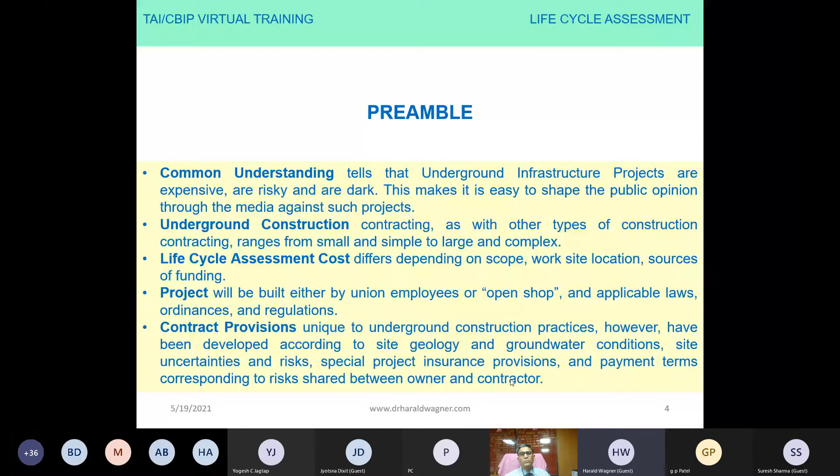Now, talking about life cycle analysis to evaluate the environmental impact of a project and the consequences generated throughout its life from different aspects, such as materials acquisition, construction, operation and maintenance, and finally its disposal and end-life treatment at the end of the project.

Life cycle cost analysis is considered an appropriate methodology by decision makers to evaluate the economical and socio-environmental sustainable infrastructure consequences of a project. It has many applications, among which it allows decision makers to compare and choose the best alternative to achieve sustainable development.

Usually, alternatives are considered between above ground and below ground structures, and in that respect many times we compare bridges and underground tunnel structures. Life cycle cost analysis is also utilized in the decision-making process during the planning and design stage in order to evaluate all constraints related to that specific project.

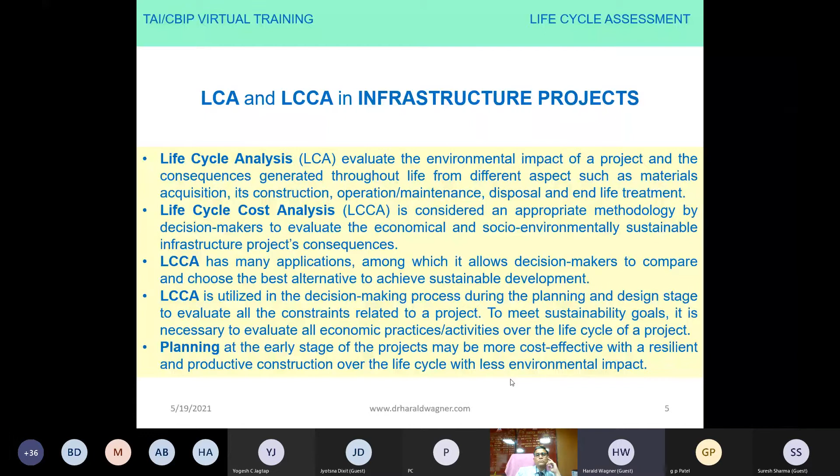That gives an additional dimension to every project if we not only consider the actual cost of construction in terms of excavation, tonnage of steel and cubic meters of concrete and so on, but also include the life cycle cost of the project itself, and if there are alternatives between different options.

In life cycle assessment, as we know, underground infrastructure may be susceptible to deterioration and issues associated with changing technologies, climate change, and societal needs. So aging of the underground infrastructure is just normal.

Underground space development requires a long-term commitment to technological advancements in an environment that is friendly to improved planning, innovation, and implementation. There exist few data regarding the environmental and social impacts and life cycle sustainability of urban development that can inform technology and administrative decisions related to the long term.

Long-term means considering decades or even centuries of infrastructure operation, maintenance, and reduced costs.

Comprehensive and scientific retrospective studies of the direct and indirect costs and impacts of various types of underground projects are needed to evaluate the usefulness and economic, environmental, and social impacts so that future planning can maximize sustainability. If we do not cover these life cycle aspects and assessment of life cycle costs, infrastructure and underground infrastructure projects are not completely in their consideration.

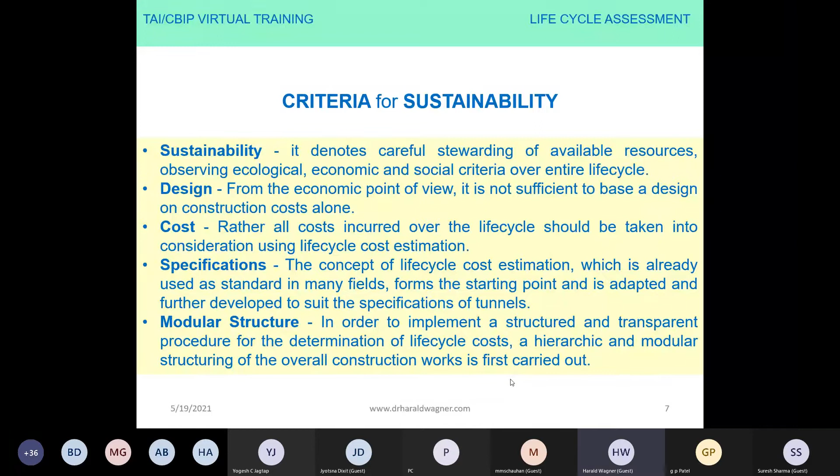The concept of life cycle cost estimate, which is already used as standard in many other fields, forms the starting point and is adapted and further developed to suit the specification, in particular of tunnels, as we are talking about tunnel structures essentially. In order to implement a structured and transparent procedure for the determination of life cycle costs, a hierarchic and modular structure of the overall construction works first has to be carried out. So this covers the criteria of sustainability.

Now, we are living in times of climate change and also on the influence, in particular, of CO2 concentrations, and in particular on the connection between carbon dioxide and global temperature increase. So we are talking about cost versus different options for life cycle project stages.

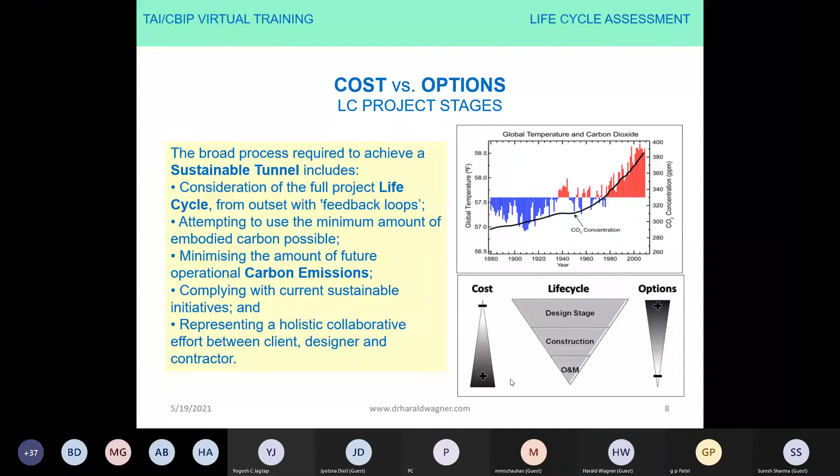One of the most important aspects is the ability to allow a company to reduce costs with an overview of the project. If the project is going over budget, we have to look at life cycle costs to help determine what alternatives are available to achieve cost reduction. Alternatives such as design, building components, and much more are just examples of such alternatives in life cycle costing in construction.

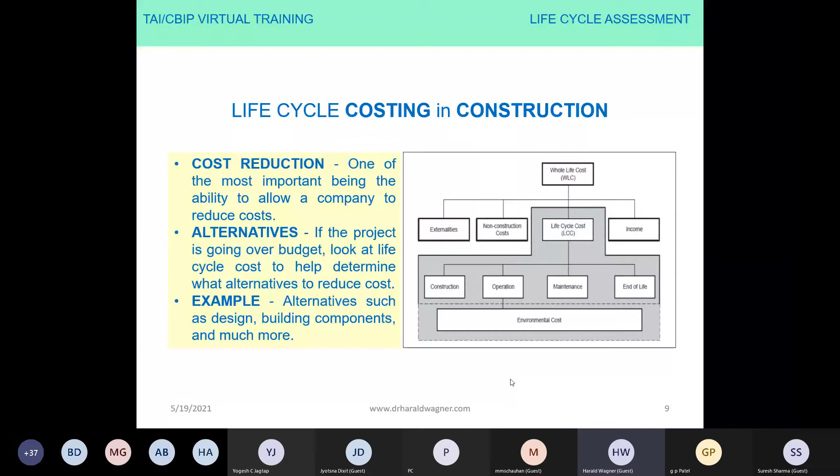What are the benefits of life cycle costing? First of all, life cycle costs shall help to determine alternatives for a more cost-effective and benefit-based project. So we like to optimize cost efficiency and benefits.

Factors that are determining over the entire lifespan of the project should allow the company, the owner, to encompass what they should do entirely. It is important to know that a life cycle cost doesn't necessarily determine the cheapest option from the point of view of starting the project available for a construction team.

It actually helps a company to determine the largest economic advantage with consideration of cost and benefit over the life of a project. Besides the ability to reduce costs, a life cycle cost helps a construction team to determine the maximum benefit of that project. This is done by analyzing the cost with the benefits in mind. Combining the two is what determines the overall success rate of the project.

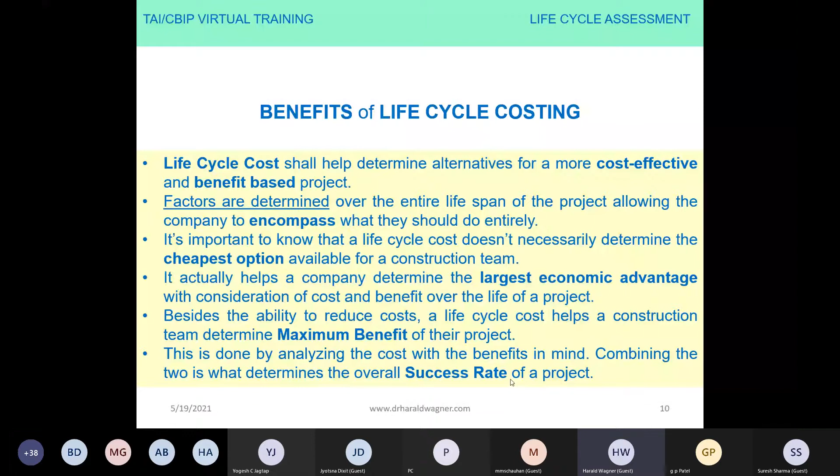Life cycle cost estimate starts with the evaluation of underground structure and often results in disputes regarding their construction cost, without considering their long-term benefits and neglecting their life cycle cost. So that can bring a project to a failure state.

There are trends towards sustainable structures in underground infrastructures. These have recently increased, and that is one of the benefits of life cycle cost evaluation and estimation. While estimating life cycle costs in civil engineering projects, the respective components reflect this development, the components which are determining the project itself.

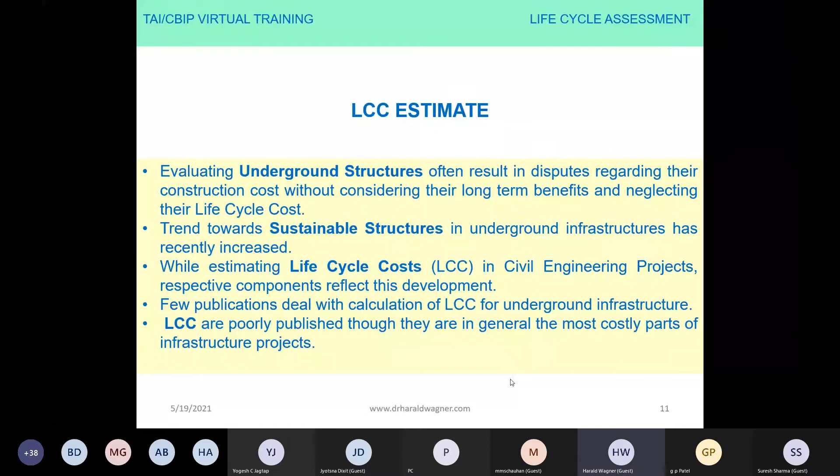Few publications deal with calculation of life cycle costs for underground infrastructure, and unfortunately not enough is published on that. Life cycle costs are poorly published, though they are generally the most costly part of an infrastructure project if we consider the whole life cycle.

We look into life cycle costs from start to end. Resource extraction and actual resource origin have to be questioned, as regarding cost and environmental impact, this is important in determination of the resources of the project.

After resources, actual construction happens, and the best suited contractor should be awarded the contract from the point of view of cost, reputation, and environmental impact assessment.

The third step is the on-site construction, which is the main component for the company, looking at the area of the entire project.

Occupancy and maintenance determine everything in the life cycle cost. Occupancy and maintenance of a project should be just as heavily looked after as everything else.

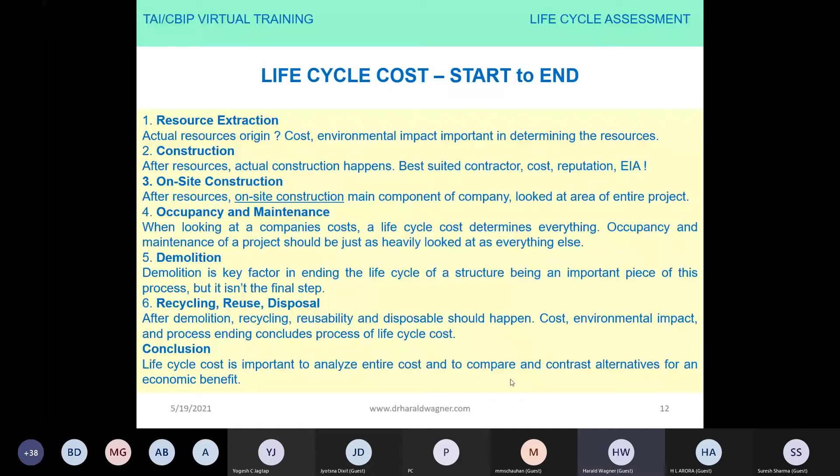From acquisition of material to operation, we have to look into the life cycle cost over the whole project, for instance for 30 or more years. So the systems acquisition covers about 20 to 40% of the whole, and the operating and support covers 60 to 80% of the whole life cycle cost.

Life cycle assessment has to study the environmental aspect and potential impact throughout the life cycle of the structure, from raw materials acquisition through operation, use, and disposal. General categories of environmental impacts need consideration, including resource use.

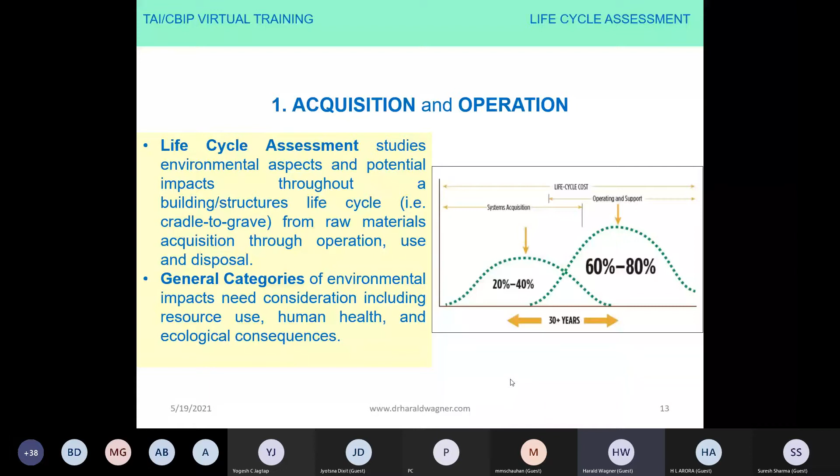Service life and capital cost are shown on this graph, which considers project identification, strategic planning, advanced life cycle and feasibility design phase, preliminary phase, detailed design phase, and the installation, construction, commissioning, and handover of the project.

At the beginning of project identification, we have approximately 75% of the project cost reduction opportunity, which decreases with further development of the project to 35, 22, and 16% of capital cost reduction opportunity, while on the other hand, the percentage of decisions affecting the total life costs increases.

There is a standard in development, ISO 15686, dealing with service life planning and the decision process addressing the service life, for instance, of a tunnel structure.

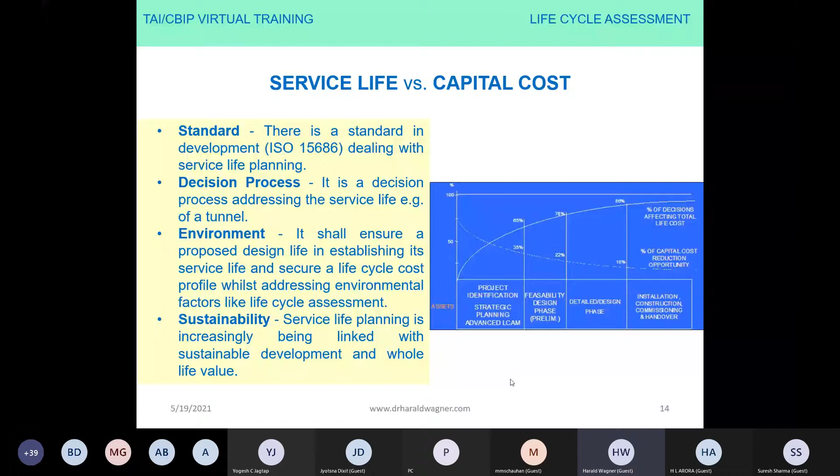It shall ensure a proposed design life in establishing its service life and secure a life cycle cost profile, addressing environmental factors like life cycle assessment. Service life planning is increasingly being linked with sustainable development and the whole value of the life cycle.

The life cycle costing and assessment starts with the initial costing, service life costs, maintenance costs, operating costs, and finally disposal costs. This is called whole life cycle costing.

It is the process of compiling all costs that the owner or producer of an asset will incur over its lifespan. The costs include the initial investment, future additional investment, and annually recurring costs, minus any salvage value.

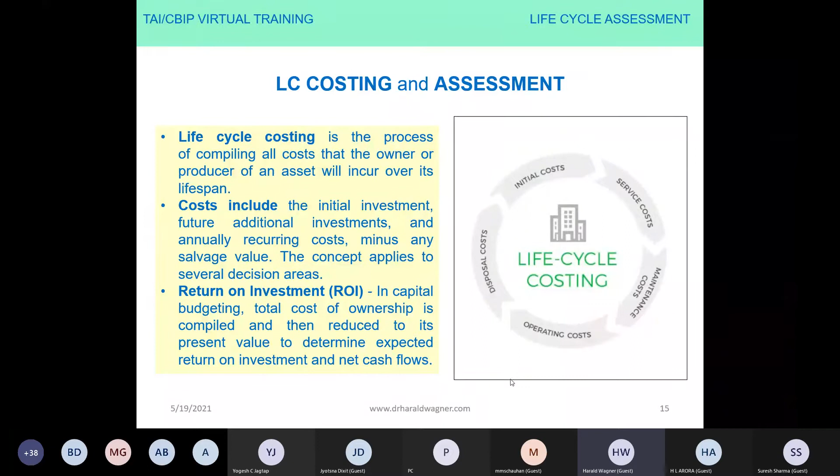The concept applies to several decision areas. Regarding return on investment in capital budgeting, total cost of ownership is compiled and then reduced to its present value to determine expected return on investment and net cash flows.

There is a modular process in total: scope of the analysis, followed by the development or adjustment of the life cycle cost model, defining the team and collecting information, populating the model, reviewing and optimizing the model, the decision and implementation of the solution, and finally the maintenance of the model.

The modules represent independent units built up for comparability between different alternatives. The process variety is then assigned independent of life cycle phases. This method of structuring enables a recording and evaluation of life cycle cost.

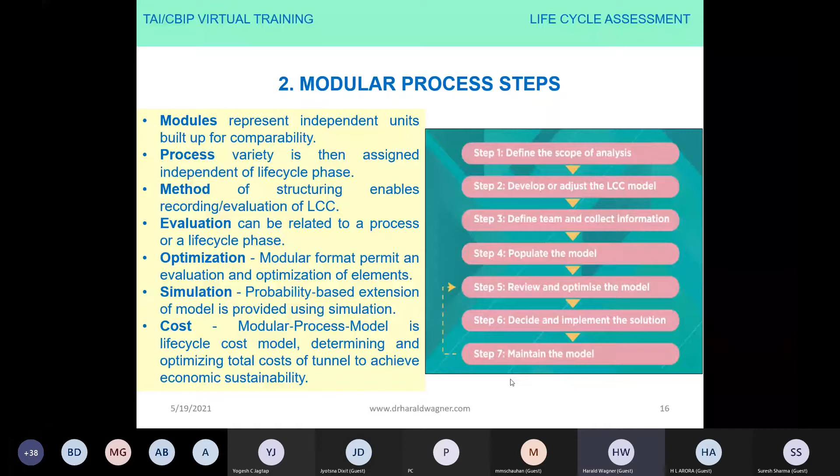The evaluation can be related to a process or a life cycle phase. The modular format permits an evaluation and optimization of different components and elements of the project. A probability-based extension of the model is provided using simulation models, and this modular process model is a life cycle cost model, which determines and optimizes the total cost of a tunnel to achieve economic sustainability, the final goal.

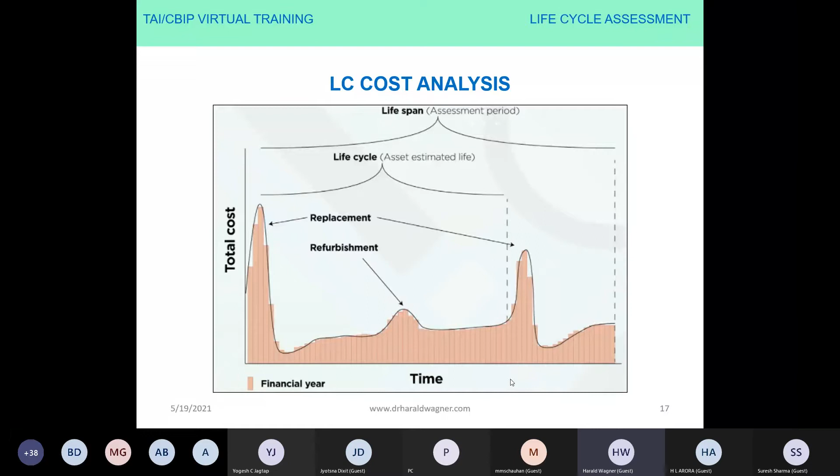In a short graph, an overview of life cycle cost analysis: we have a lifespan, or so-called estimated life of the project. We have total costs and replacement costs, and then we have costs over time for the refurbishment of that particular project.

The generic cradle-to-grave life cycle covers the mining of the project, the primary and secondary material processing, the fabrication or construction, the reuse, and the disposal, and finally the landfill, which may be the final ending of the life of the project.

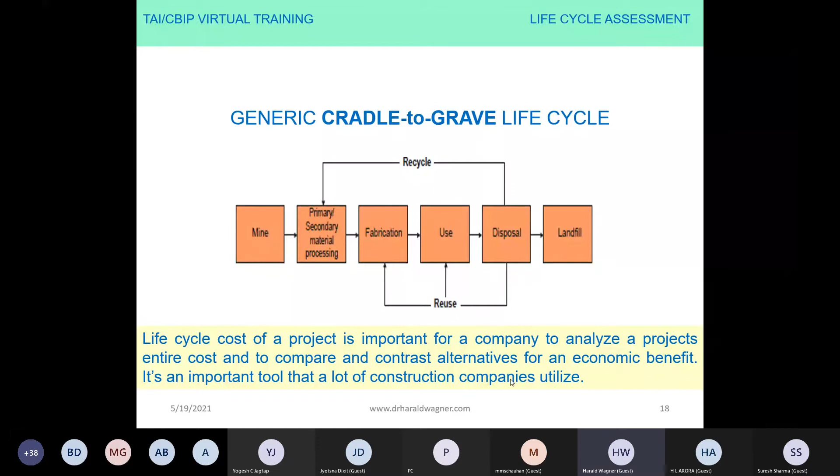The life cycle cost of the project is important for the company to analyze a project's entire cost and to compare and contrast alternatives for an economic benefit. It's an important tool that a lot of construction companies nowadays have to utilize when they consider the project.

What is the life cycle benefit and the life cycle cost? Underground space developments provide the opportunity to use surface space for other purposes such as green space, and I will give you in the following slides an example from the Boston Central Artery and from another project in the western part of America, from the Alaskan Way in Seattle, Washington State.

The parks or other above ground development within or closer to urban centers use—while quantification of such opportunities is sometimes difficult—should be included in the consideration of the sustainability of a project. Low impact design of infrastructure systems shall reduce the environmental impact, and transportation costs is now incorporated.

Hello. Incorporated into urban development, and this has been focused on the Transportation Research Board annual conferences in Washington in 2009. Can you still hear me? Yes, sir. Hello. Okay.

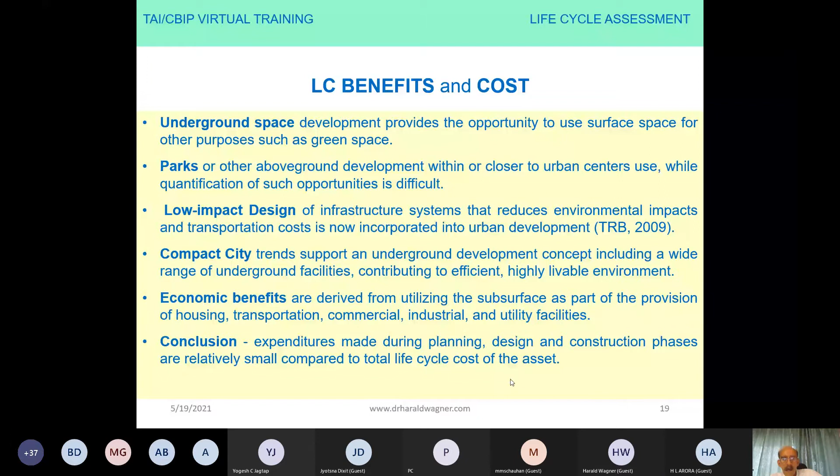In conclusion, it can be said with regard to life cycle benefits that expenditures made during planning, design, and construction phases are relatively small compared to total life cycle costs of that asset. So therefore, they are so important.

Now, let us consider compact development and smart cities, and take the example of the Boston Central Artery, where an elevated structure has been compared with an underground structure. I spent many years traveling from Boston to New Hampshire.

So the Central Artery Boston project has been one of the major urban projects, an example of the increasing population in that urban area, and of the change in transportation from individual traffic to mass transport traffic.

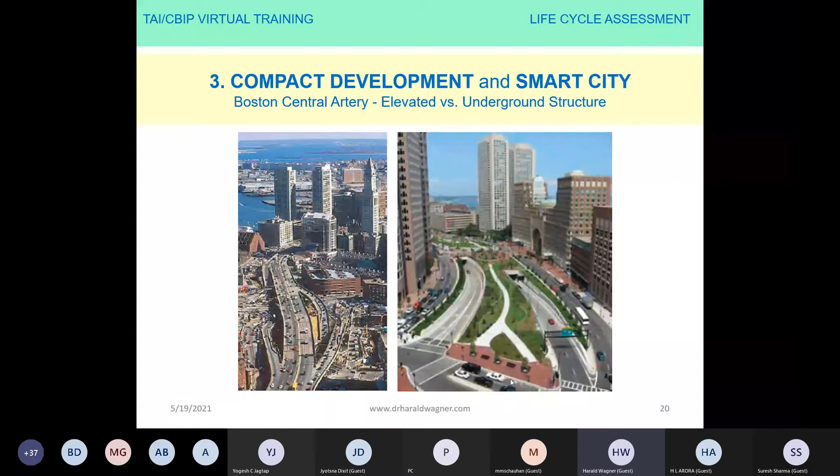This shows the braced excavation for a cut and cover section of that Boston Central Artery, which during construction, of course, has a very heavy impact on surface life. But finally, after completion of the project, the benefit is shared by everybody.

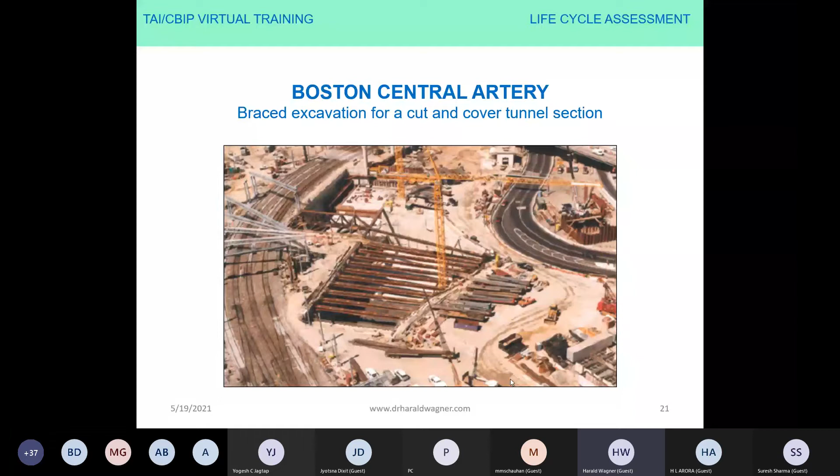The Boston Central Artery also focused on reuse of excavation materials. The excavation material from Boston Central Artery, also called the so-called Big Dig project, was uncontaminated and has been used to stabilize slopes and fill and cap the landfill to convert it into recreational landscape and recreational use.

The material was transported in more than 4,400 barge loads—these are big ship loads—to the island, beginning in 1992, and was used to cap the landfill with a 2-foot clay cap. The cap created an impervious layer that would serve to keep precipitation from mixing with the wastes beneath and leaching into the harbor.

The excavated fill was mixed with biosolids from several waste composting facilities in New England to create topsoil that was subsequently vegetated to keep the cap in place. Approximately 2,400 trees have been planted and 26,000 shrubs were planted on that fill.

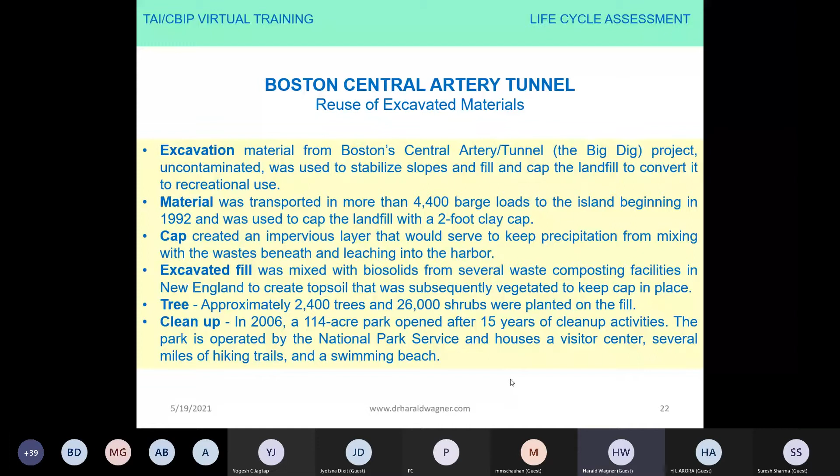So let's talk about above ground versus underground projects and impacts. It has to be mentioned that there is anecdotal or partial evidence of the positive environmental and financial impact of replacing above ground transportation structures with underground alignments on neighborhoods worldwide.

According to an in-depth review of the City of Boston tax assessing records by the Globe, in the 15 years since the Central Artery Tunnel project began, the value of commercial properties along the mile-long strip that this year will become the Rose Kennedy Greenway increased to 2.3 billion, an increase of up to 79% in value. That's almost double the citywide 41% increase in assessed commercial property values over the same period.

When adjusted and aggregated over the entire Central Artery project alignment, the increase in land values could be of the same order of magnitude as the cost of such a difficult and expensive project. So that is my preaching always, that when I'm trying to convince public clients and project owners that the underground solution is cheaper than the above ground project, one of the main components is the increase of land value, and the other component is the life cycle cost.

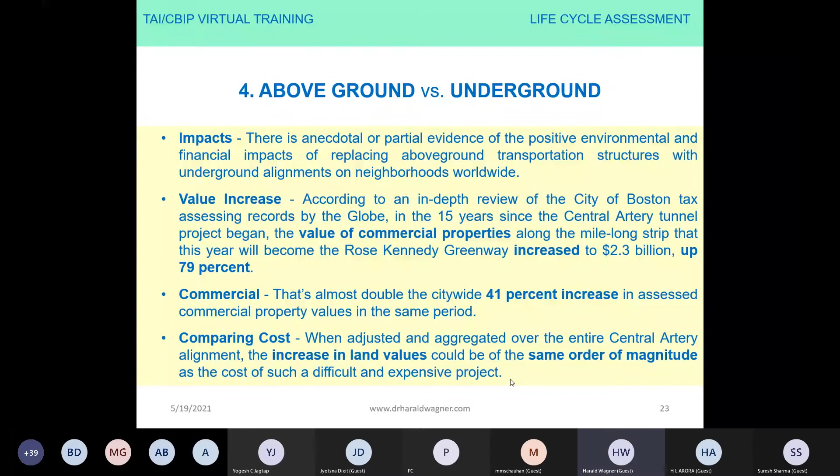So when we talk about planning and assessment, underground transportation tunnels such as the Boston Central Artery project required rebuilding and relocating existing underground utilities in the right-of-way of the tunnel structure. The building foundation may make reuse of underground location prohibitively expensive, precluding underground parking, tunnels, or other uses in that location. The underground construction may increase cost and reduce flexibility of options for alternative future uses.

But it remains that because most underground facilities, even after their useful life ends, extra costs or difficulty of reusing the space continues nearly indefinitely. So there is a gain there in summary. A comprehensive planning effort would recognize that underground space is a resource that should be used in the best manner possible, rather than letting initial uses preclude later uses. Similar conclusions have been drawn with respect to limiting space debris in orbits around the Earth that may prevent use of those orbits for other purposes.

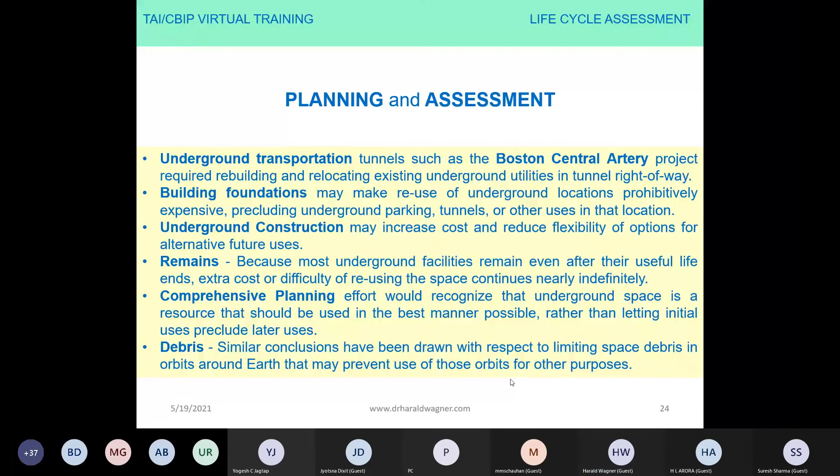Interesting also is the cost for mining and lining, as an example, for a 20-foot tunnel. According to data supplied by the Washington Metropolitan Area Transit Authority between 1969 and 1994, accumulated knowledge and risk management, investment in research, and adoption of better technology and contracting practices over the period resulted in cost reductions for actual tunneling construction. This graph shows differences between earth, rock, and mixed excavation.

Between 1968 and 1996, there is a significant decrease in the tunnel cost per linear foot. This is attributed, among others, to the evolution of technology.

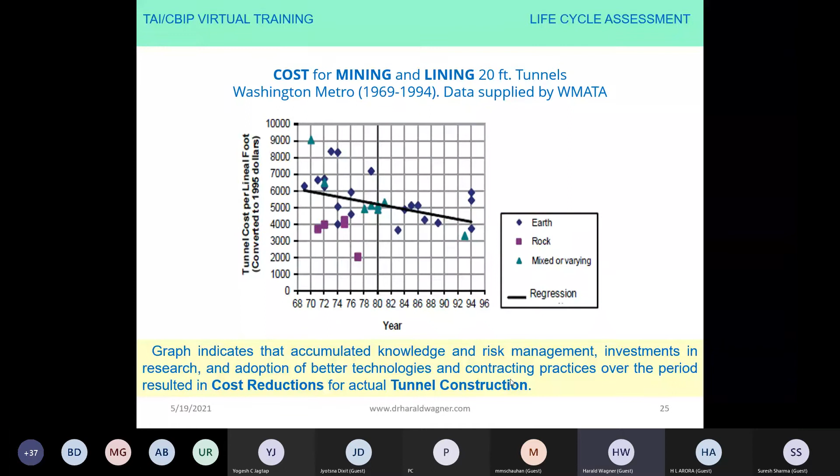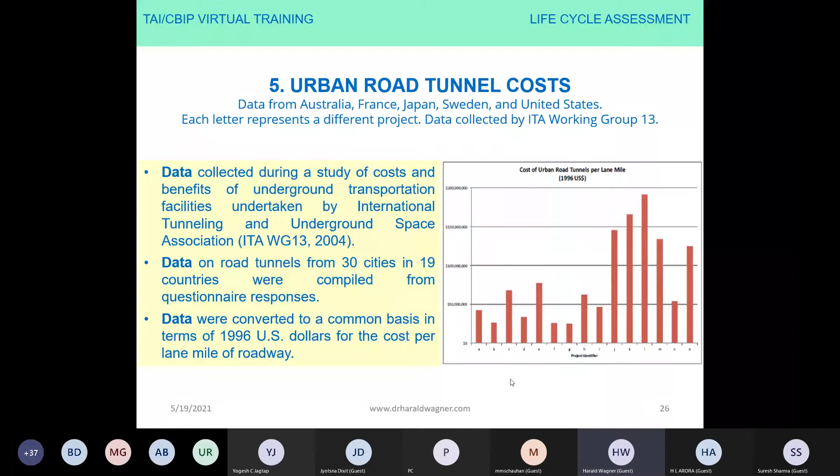This working group collected data during a study of costs and benefits for underground transportation facilities, where data on road tunnels from 30 cities in 19 countries were compiled from responses to questionnaires. The data were converted to a common basis in terms of 1996 US dollars for the cost per lane mile of roadway. They look to be very different, and they are different, of course, not only because of different countries, but also because of different geologies, for instance.

The costs vary because of what is counted in each project's cost. The variations observed among countries in constructing a lane kilometer of roadway suggest that it would be worthwhile to investigate the reasons for lower costs in some countries. Also, local geology may have played a significant role, though it is not expected to be the only significant reason for the observed variations. Differences in design standards, administrative review processes, public engagement, and streamlining of design and construction processes may be increasingly important also.

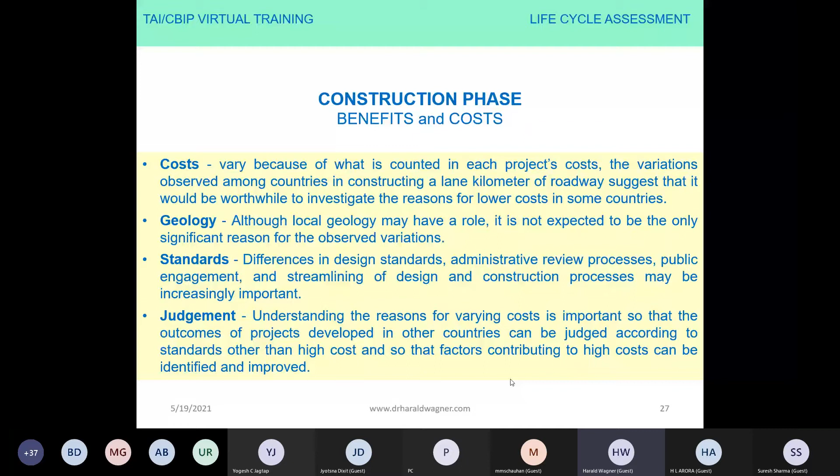In order to understand the reasons for varying costs, it is important that the outcomes of projects developed in other countries can be judged according to standards other than high costs, so that factors contributing to high costs can be identified and improved, and clarified also, answering the question of why there are differences, and whether there are benefits related to the differences in costs.

So life cycle assessment has different impacts. Environmental impacts in preparing life cycle assessments shall include as follows: it shall include, of course, resources.

That may be one reason. It may also have a direct impact on nature and landscape through undesirable change in landscape. Change in landscape may also include landscape shaping.

It may include also impacts from climate change, air pollution, smog, acid deposition, deterioration of the ozone layers. It may include impact also from polluted soils, solid waste, added toxins, groundwater pollution, surface water impacts; biological, chemical, and toxic discharges may have impacts also. Impacts from noise, impacts from radiation, electromagnetism, radiation fields, ionization, ionizing radiation.

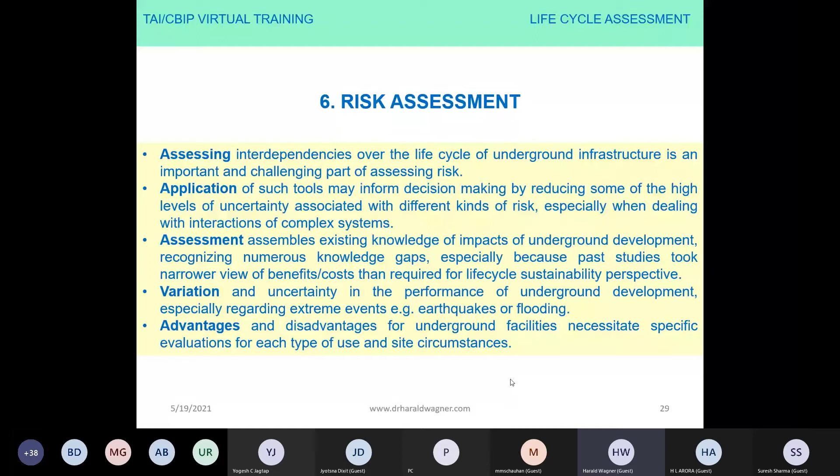So the life cycle of any infrastructure project is grouped into four phases: planning phase, design phase, construction phase, and operational and maintenance phase.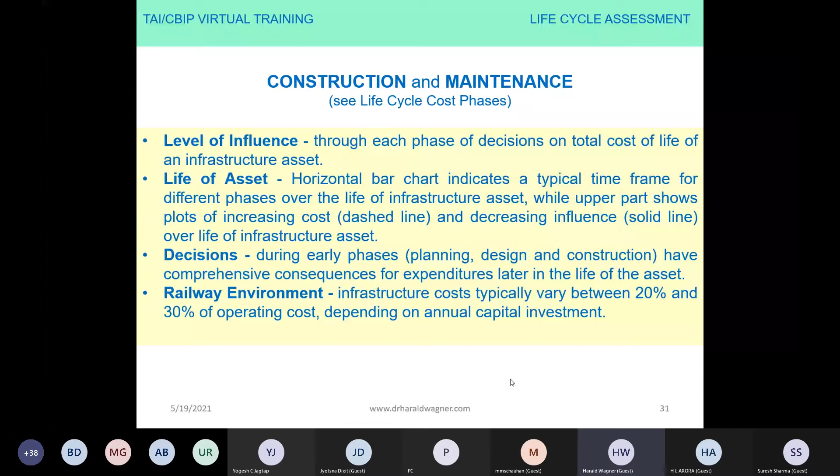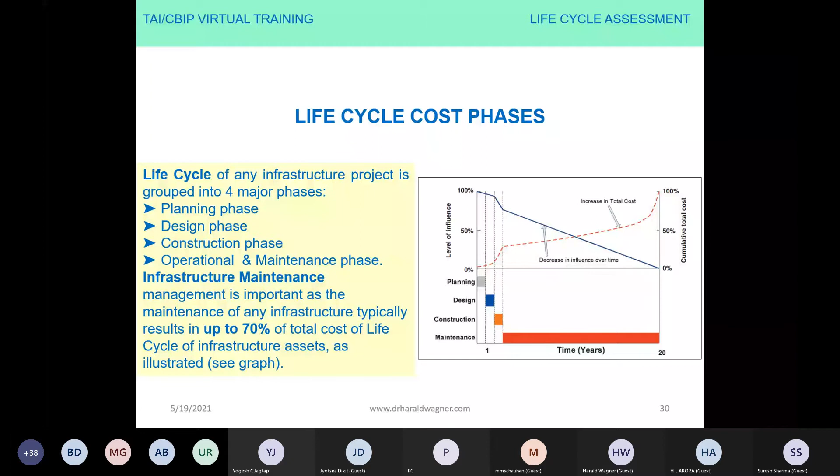Now let us talk about sustainable and resilient urban development and contributions to underground engineering. An urban setting is basically a system of systems, so they are overlaying systems.

The broadest relationship between underground space use and the essential elements for urban sustainability are systems on top of systems. The physical qualities of infrastructure related to transportation, shelter, food, water, and key material resources contribute to sustainability or make them vulnerable to hazards as described above.

The risk focuses on more direct relationships in terms of maintaining enduring, livable communities and enhancing risk mitigation through the use of appropriately planned and designed underground facilities.

Advances in human safety issues, analytical techniques for life cycle cost assessment of underground facilities, and the broader triple bottom line analysis—meaning financial, economic, and social performance—and specific technological advantages associated with enhanced sustainability are discussed under safety aspects and under sustainability and resilient urban developments.

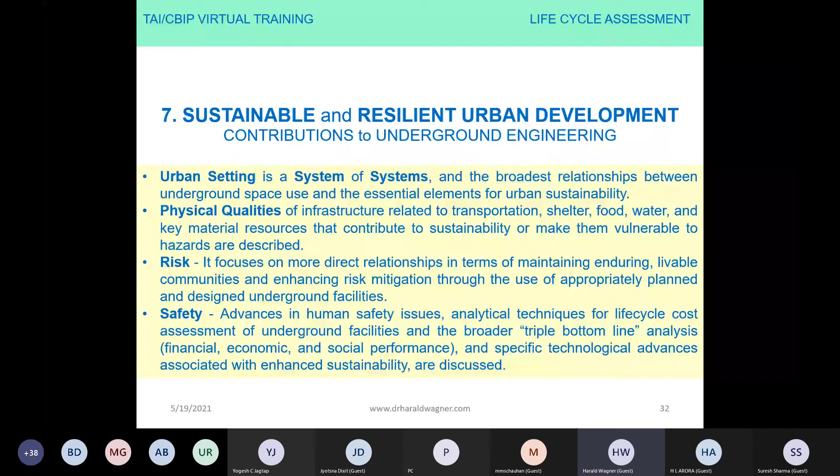What are the transport system challenges and opportunities? Construction of major underground transportation projects often requires significant relocation of in situ underground utilities along public rights of way.

Excavation work and relocation needs of the project provide key opportunities for renewing and rationalizing utility provision in an area, to provide for easier future maintenance of those systems. An overall benefit is provided through the urban community by using a system of systems analysis rather than a project-by-project analysis. So system-to-system analysis is crucial for the final evaluation of an underground transport project.

Sustainability of an underground transportation system is improved when system design allows for as much flexibility as possible in the project, taking into account future uses, potential for additional transportation lines, and intermodal connections. This can increase initial costs, but provides for better long-term sustainability and, as elaborated before, for life cycle cost inclusion, which makes the project in many cases cheaper than only considering installation cost.

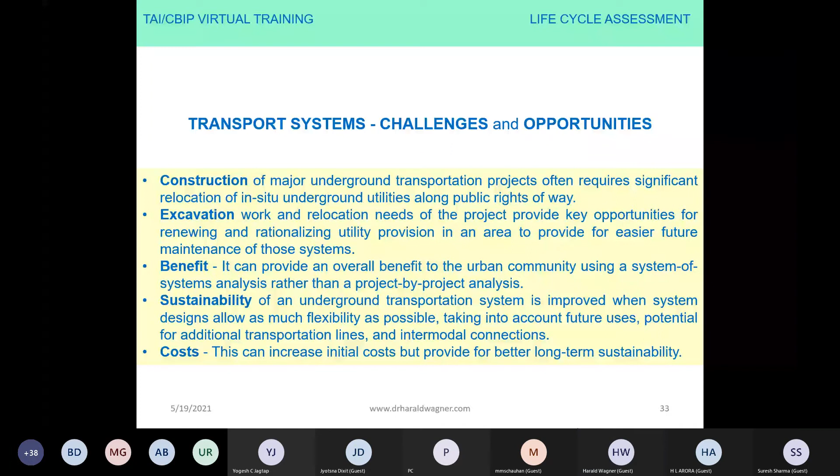When talking about roads and highways in urban environments, the underground urban road and highway typically traverses deep below a city from portals at each end that tie into existing service road networks. Tunnels avoid building foundations and other in-place services and leave space closer to the surface for future installation, provided, as in the case of the Boston Central Artery, that you go deep enough and don't touch existing foundations. Tunnels constructed at depth will be the lowest cost among alternative underground solutions if a life cycle cost analysis is prepared and geologic conditions are respected.

Geologic conditions, hydrologic conditions, and of course climatic conditions are important to consider. Barriers to free-flowing traffic can be bypassed, travel times can be shortened, and carbon emissions can be reduced for the same distances traveled by surface road. So again, I'm a strong promoter of going underground in urban areas.

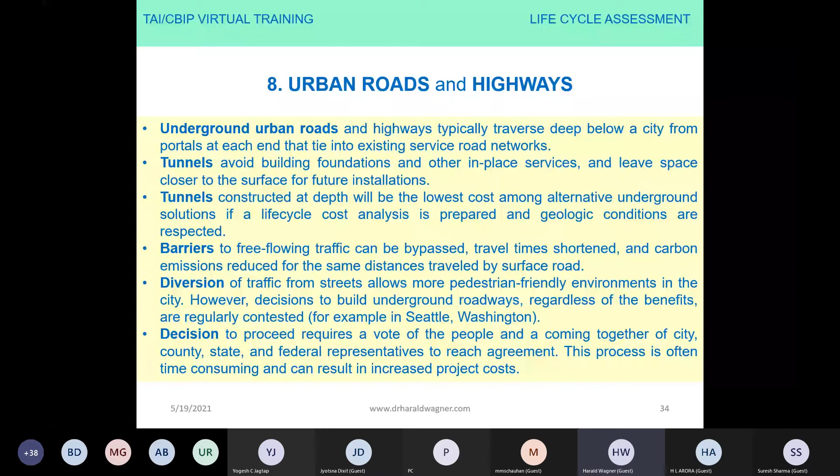However, decisions to build underground roadways, regardless of the benefits, are regularly contested, as shown in the example of the Alaskan Way in Seattle, Washington State. Decisions to proceed require a vote of the people and a coming together of the city, county, state, and federal representatives to reach a common agreement. This process is often time-consuming and can result in increased project costs. But it is important to communicate every piece of information about not only installation but also life cycle cost.

Now, talking about a second typical example of a successful project, the Alaskan Way Viaduct replacement in Washington, in the city of Seattle. You can see in the picture the Alaskan Way Viaduct, which was a double-deck expressway along the city's waterfront.

The decision was made to bore an urban underground bypass expressway and remove the damaged viaduct and restore an accessible scenic waterfront. The tunnel finally was a 3.2 kilometer, 4-lane bypass roadway tunnel located deep enough under the city to avoid the century-old Burlington Northern Santa Fe Railroad tunnel in daily use, a large interceptor sewer, and existing building foundations. That was a tremendous, challenging project at that time.

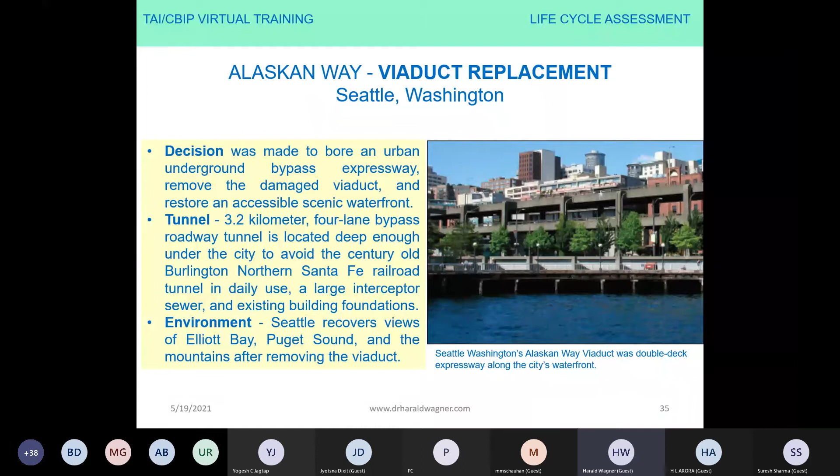Now, the Alaskan Way Viaduct, after it was proposed and realized as the bored tunnel concept. The alternative solutions did include a new, wider, two-level viaduct on the same alignment, and the replacement of the viaduct by a wide surface street carrying significant levels of through traffic. You can see in that concept the proposed bored tunnel of State Highway Road number 99.

Everything is included in that huge tunnel, which was the biggest tunnel at that time. It was an almost 18-meter diameter circular tunnel, a precast concrete segmental lined tunnel, TBM bored. Another alternative considered was relocating the highway on a bridge or tunnel over or under Elliott Bay.

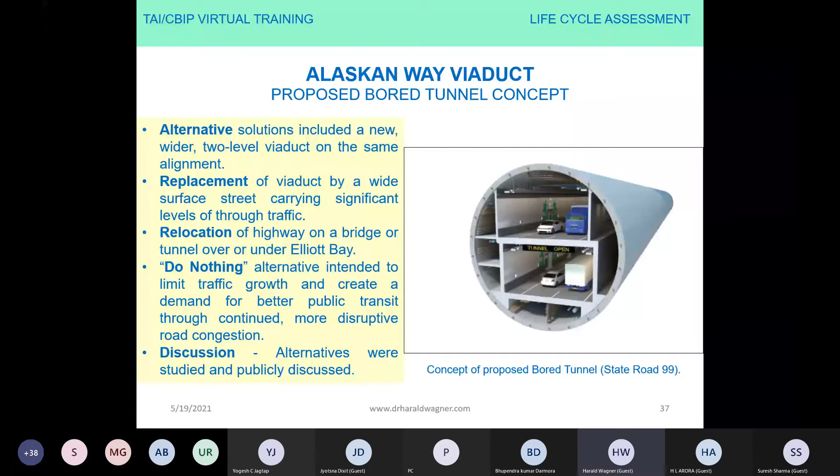The alternative of doing nothing was also considered, intended to limit traffic growth and create demand for better public transit through continued, more disruptive road congestion, which definitely was not realized. The alternatives were studied and publicly sufficiently discussed. So finally, the people of Seattle decided on the bored tunnel, and it was not an easy project for sure, but it was finally a very successful one.

So I would like to give you an idea of what underground engineering, tunnel engineering, among others, means. It means, among other things, permanent evolution of technology. So innovation can advance engineering practice, increasing the appeal of underground space. Advances in technology have been crucial to efficient and economical developments.

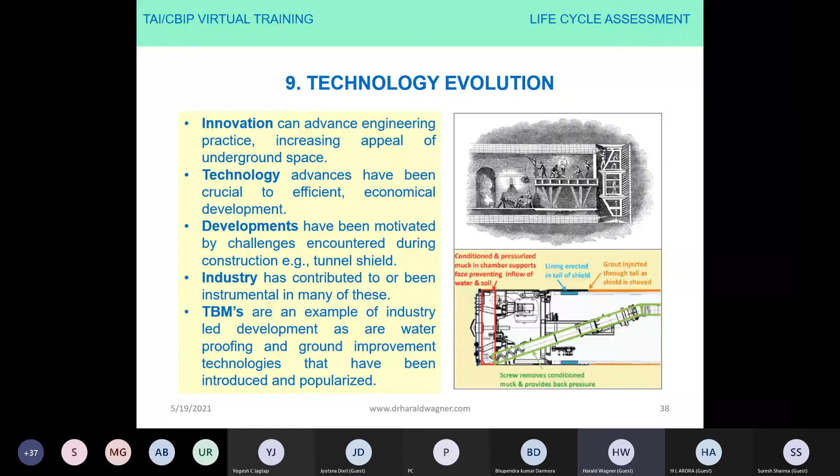And now we even can talk about projects which have been engineers' dreams, but now they are realized, which would be another virtual lecture in one of the future sessions maybe.

Besides, or as part of, the technology evolution, we also have to talk about data management evolution. Monitoring data is continuously fed back into enhanced design and construction, meaning that we are living with the data we produce immediately and making use of it in progressing our projects. Advances in construction monitoring are moving away from physical measurements to wireless connected sensor networks.

30, 40 years or more ago, we had convergence measurements done manually. Nowadays, everything is data management, and also everything is done based on lasers. Data allow contractors to optimize construction and increase safety at the same time.

Integration of data from multiple projects can also facilitate improvement of equipment, improvement of design, improvement of performance, and prediction and understanding of material properties. Monitoring for enhanced safety becomes critical as larger diameter and shallower infrastructure facilities are increasingly proposed, particularly for urban areas, given that global population is increasing not in rural areas but in urban areas. So urban areas and urban infrastructure investment and improvement are crucial for the development of our culture and societies.

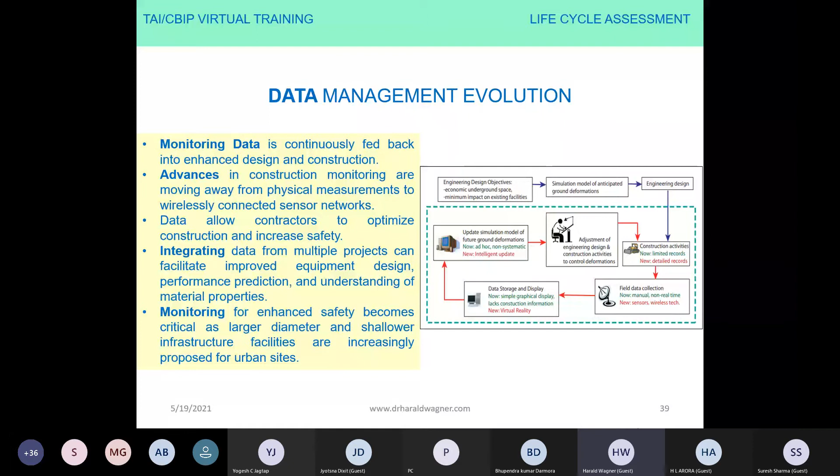Now, talking about urban systems, the development of underground space as part of sustainable urbanization requires coordinated communication with all stakeholders to better incorporate site-specific conditions, greater flexibility, and long-term community needs into infrastructure system design, and finally to optimize life cycle management. There is relatively little strategic coordination of underground infrastructure development. Hopefully there's more coordination in the future.

The administrative support and management of underground infrastructure, as part of an integrated, multidimensional, above and below ground system of urban systems, is vital to urban sustainability. So administrative improvement is essential and very crucial. To give you an example from the geotechnical point of view, to save Bangkok and stop it sinking, major infrastructure investment is necessary, which should be based on long-term life cycle assessment to provide future sustainable urban living conditions.

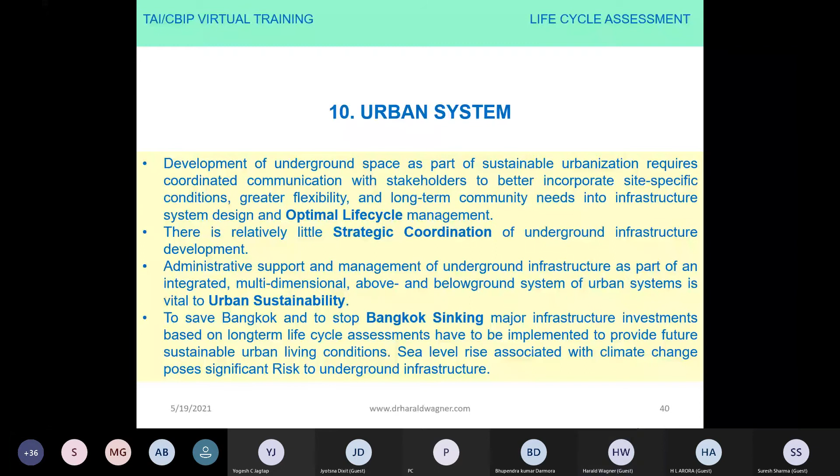Talking about development and sustainability, coordination could lead to better management of research investment, optimized decision-making, reduced risk for federal development projects, and better leveraging with state and local entities.

Also, planning by local governments of city growth does occur, but there is little analogous control of underground space, and even less control that coordinates above and below ground development. So the recommendation is to make more coordination between above and below ground. The market forces encourage workforce, capacity growth, and urban infrastructure development in an ad hoc manner inconsistent with urban sustainability.

If we look at the graph, we can see the relation between urban space with increased concentration of development activities due to urbanization and climate change, with respect to increased temperature, heat island effects, sea level rise, increased precipitation, which leads to natural disasters, urban floods, which also has to be followed up by urban disaster prevention.

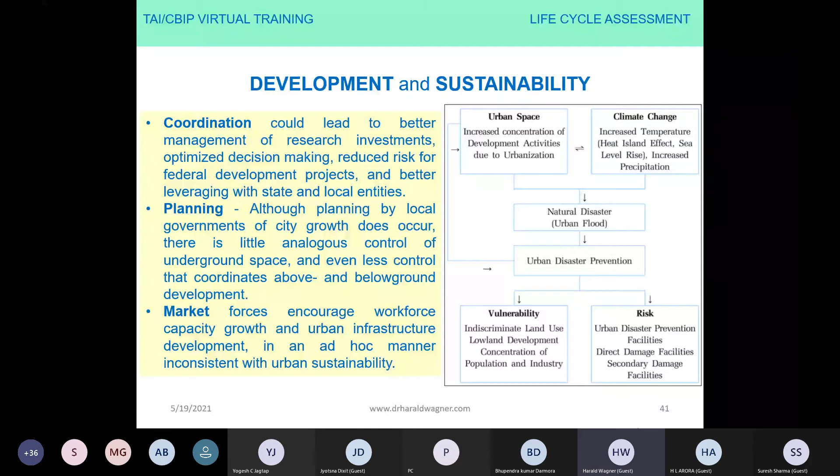So we need system management, infrastructure development, operation and maintenance, which requires management of complex physical, social, and environmental systems. Everything is interacting. The development of underground infrastructure suffers from lack of a mission agency or organization dedicated to coordinating development activities. There are, from the point of view of international organizations, starting developments and starting new platforms.

The project and research funding tend to focus on solving particular problems with little consideration of long-term impacts on the total urban system. So that is another initiative also by the United Nations, to increase this type of platform.

Complex ownership models confuse responsibility for routine inspections, maintenance, repairs, guidelines, budgets, and liability. As we are increasing our population, I think we also have to increase communication between different platforms in order to avoid confusing responsibilities. There is a need to understand the ownership and control models of underground space and to develop guidelines for funding and performing essential periodic inspections, maintenance, and repair of individual infrastructure elements.

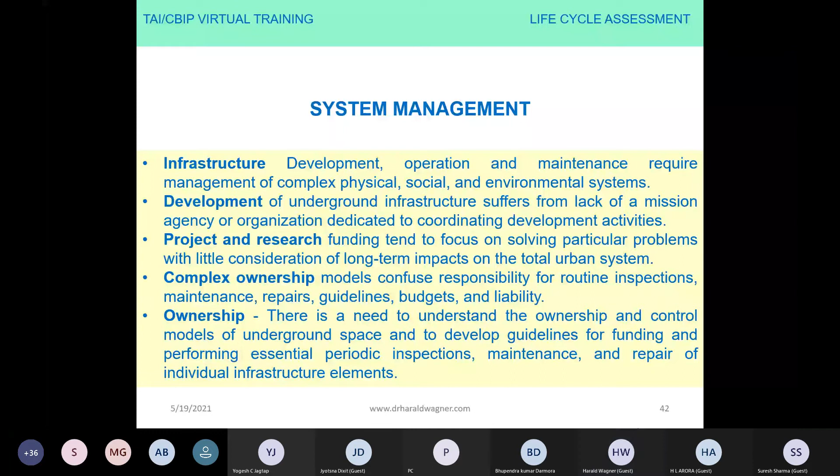The number of university programs dedicated to integrated underground engineering, research, and education are affected. I know that different universities have different initiatives, and in that aspect, I would also like to mention the International Tunneling Association Committee on Education and Training, which is supporting all of these academic efforts, strongly supporting efforts to invest and increase academic programs.

There is a critical shortage in education, training, and research opportunities for engineers who wish to learn and practice underground engineering on a global scale. The Central Board of Irrigation and Power and Tunneling Association of India are a very, very brilliant, excellent example of fighting for more education and making efforts to improve and offer opportunities to all engineers with interest in underground structures.

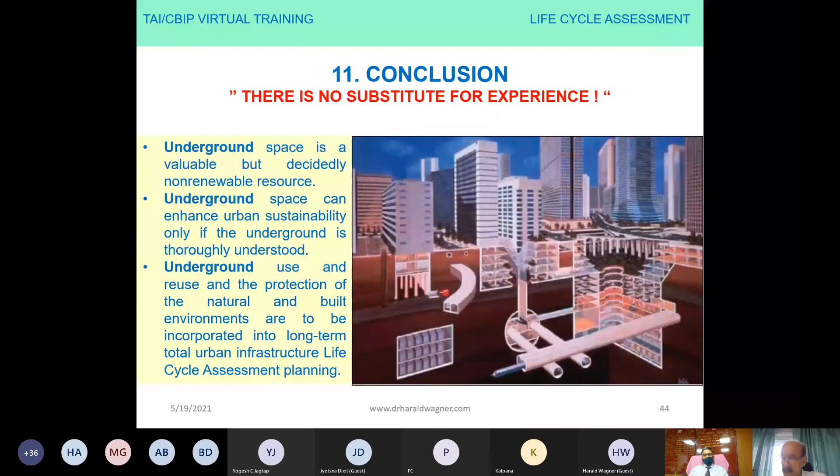I'm sorry to share, but it's a fact on the ground, very common to see, at least in India, that on one side a road has been beautifully done up, and the next day you find the sides of the road have been dug up because somebody forgot to do the drains. So when we create infrastructure, we have to not only make it resilient, we also have to see it sustains itself for at least 2, 3, 4, maybe 5 decades. Otherwise we will keep investing and reinvesting and wasting our useful resources.

So I have nothing more to say. Thank you once again, Professor. It's always a pleasure listening to you, keying into your brilliant ideas and sharing your experiences with us. Thank you once again. I take this opportunity on behalf of everybody present here to wish you a very, very happy and very safe time ahead, till we meet again. Thank you. Thank you, everyone.

Thank you very much for your very kind and competent words. I could not agree more with what you said and what you have precisely crystallized from these roughly 1.5 hours of virtual session. It is, let me call it, a harmonized interest which I feel from your side with the ideas I presented from my side. It is just fantastic.